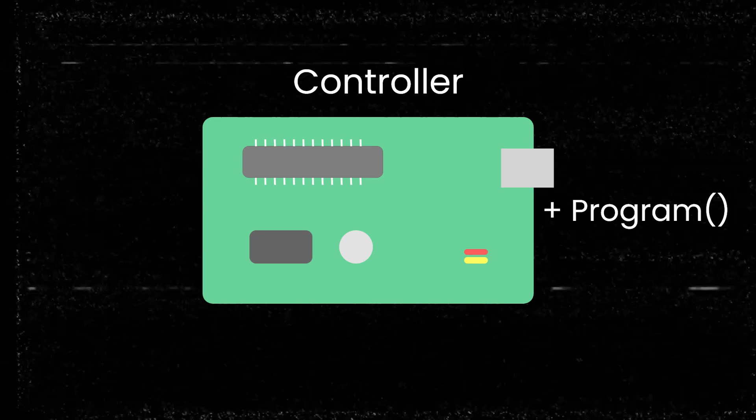For processes that don't require a human to decide how to do it every time, we can use a robot to do it automatically. Well, what is a robot? Software controlled mechanical device that uses sensors to guide one or more end effectors. Or it is just some parts connected to some motors, and the motors are controlled by some controller, which itself is blind and dumb. So we are giving it a program to follow and some sensors to see what is around it so that it performs some specific work.

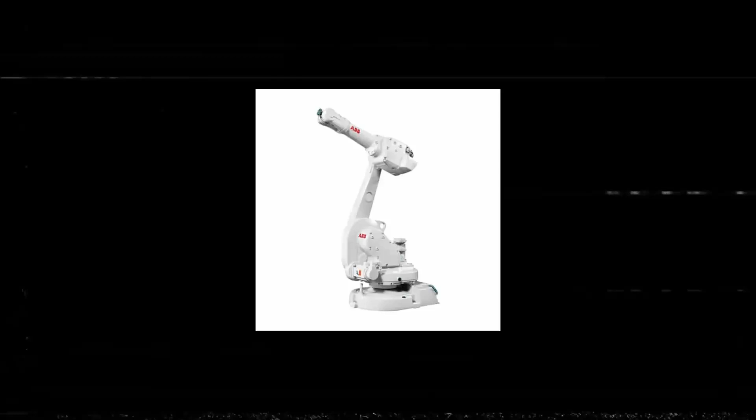Well, say you decided to buy a robot for your factory. Good. If you buy a robot from ABB or other companies, what you will get is a robot manipulator, which means the robot excepts the part which is actually going to interact with the environment. That part is up to you to decide. You can fit either a gripper or a tool or whatever you want on the attachment at the end of the robot. Whatever you fit there is called the end effector, and as the name suggests, it will be affecting or interacting with the stuff at the end of the robot.

Fine, now what? There is just one thing left, and that is programming. Programming your robot with the action that you want to perform. The action is mostly about covering a path while operating the end effector at specific times. How will you give a path? It's simple. We will just give certain points that our end effector should go through, and the controller will automatically fill the rest of the path.

Very cool, right? No, I joined a core company specifically because I don't want to do programming. And now you're telling me to do that? That too after I spent money on this robot? Calm down, comrade. You don't need to do programming. Instead, you get to play with a joystick. This is what you will be doing as an operator. You will use the joystick to move the end effector, and then you will press a button that will store the point. Like that, you will store a sequence of points, and your job is done, which is what we'll be doing today. We'll control an industrial robot, virtually, of course, using ABB RobotStudio.

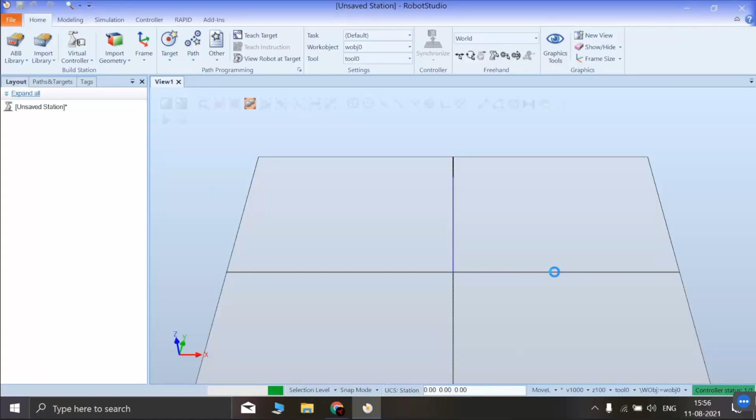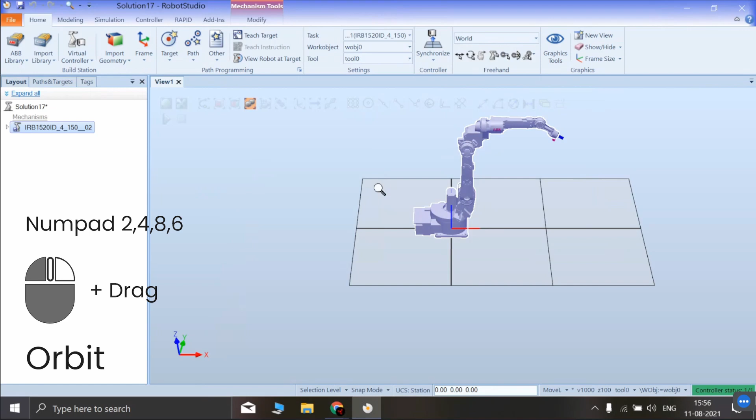Let's first set up a nice view for our robot, shall we? You have three types of motion here: zooming in and out using the scroll button. You can use your scroll button to zoom in and zoom out respectively, and rotating around the robot, aka orbiting, by clicking down both the right mouse button and the scroll button, and then drag. Here you can rotate your robot, and it's a bit fiddly, but you'll get the hang of it. Then panning, aka moving left, right, up and down, is done by holding the control button plus the left click and drag.

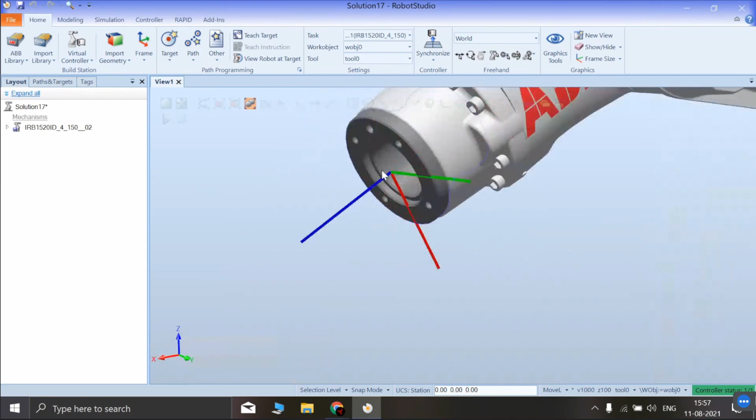If you don't have a mouse but you have a numpad, you can do it using the keys 2, 4, 6 and 8 for orbiting, and control plus the same keys for panning. And if you don't even have that, tough luck, bruh. Remember I told you about the end effector that you will attach to the robot? It is attached right here, this place. Moving that will be our goal. So yeah, we'll work on that.

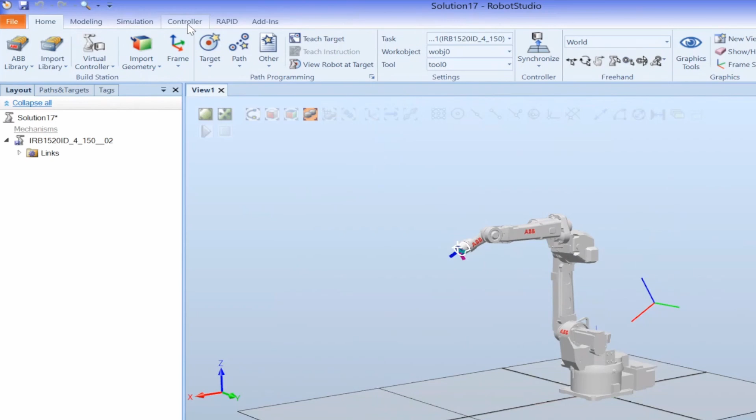And it is time we take a look at the controller, aka teach pendant or the flex pendant. It's basically a joystick. Look at the menu on top. We are in the home tab right now. Let's go to the controller tab and we'll pick our flex pendant. It's IRC5 flex pendant, it's just the model name. You can get this flex pendant for real in stores. So for now, we'll work on the virtual thing.

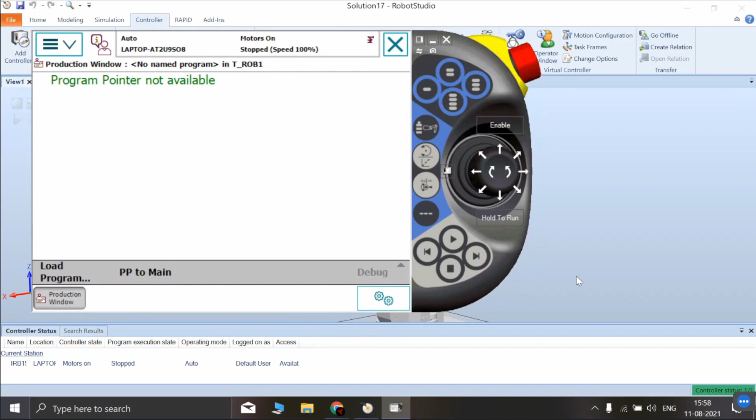But there's a thing, guys. I can't see my robot. How am I supposed to visualize it? So for that, let's try to drag it, and let's try to put our robot in a position where we can access both of the things. I guess this will work for me, right? Great. It depends on the software. Sometimes you get a teach pendant which is smaller in size, sometimes you get a bigger one. No issues.

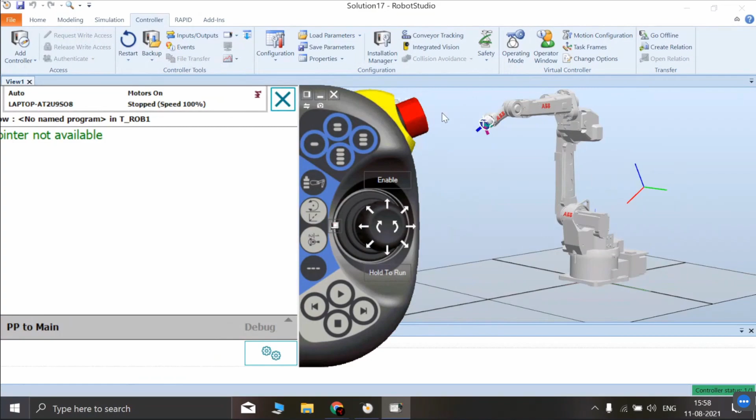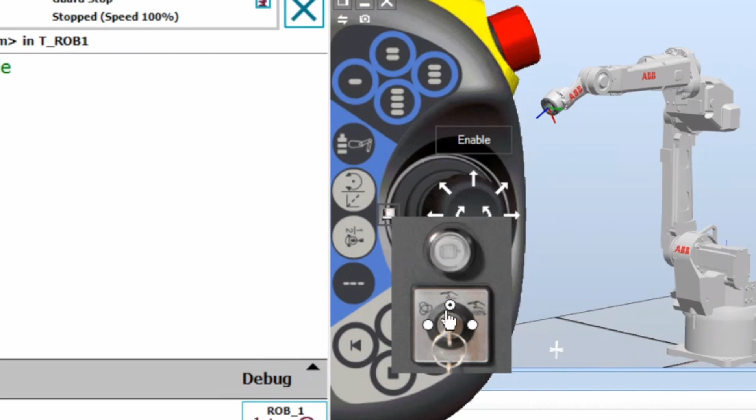So basically, there are 3 modes of operation which we can see by clicking this little icon over here. It's called control panel. Let's see it. The first mode which you can see is called automatic mode. In this mode, the robot will be executing the program we supplied to it automatically at full speed. This next mode is known as the manual mode. In this mode, we manually control the robot and create the programs. Also, the movements of this manual mode will be slow to prevent any accidents.

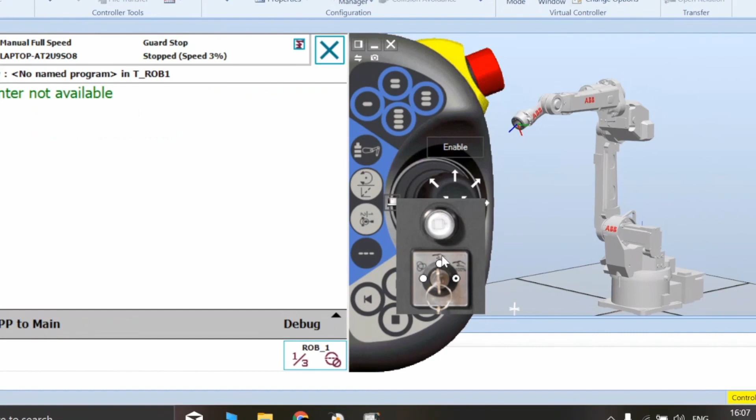This third mode over here is known as manual full speed mode. This full speed mode will do the exact same work as the manual mode, but with full speed, 100% speed. So let's put the operation mode as manual, and probably you can see this white blinking button over here. It is known as the motor engaging switch. This will be used to switch the motor and robot on or off.

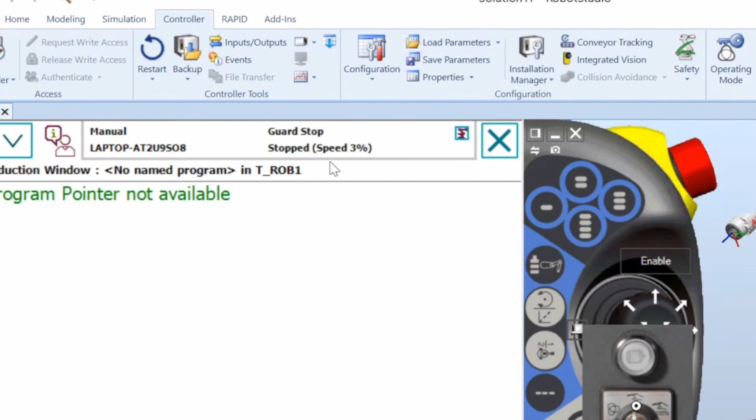Now you will be asking how to know if the motors are on or off. Well, that status is shown here. Currently, the robot is in guard stop state, which means it's stopped. Of course, we need motors on state, which is done by clicking on this little guy here. By enabling it, the communication between the flex pendant and the actual robot is enabled.

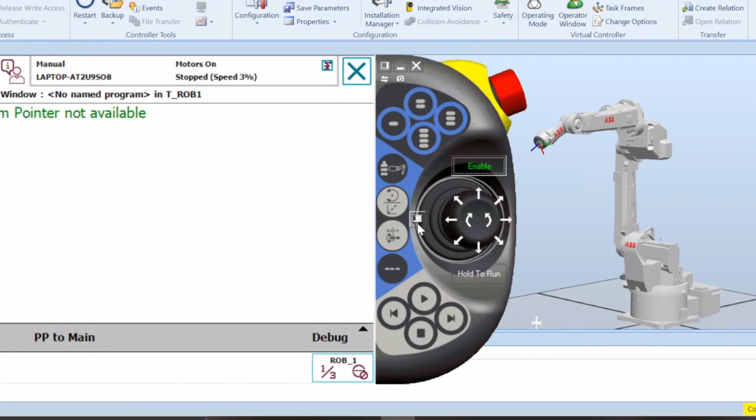A little warning, there is a possibility that sometimes the enable button doesn't put the guard stop off. Don't worry, it's just a glitch. You just have to switch that enable button off and on again and it will work perfectly. So I guess we enabled everything. All right, we have enabled the controller, put the robot in manual mode, and we are all set, people.

Joysticks, everyone's favorite. How to use it virtually? Simple. You can see the different arrows, right? Clicking on them moves the joystick in the direction. We have 3 independent directions to move it: up and down, right and left, and then twisting it. These 2 are for twisting it. With all that, let's see what happens when we do it.

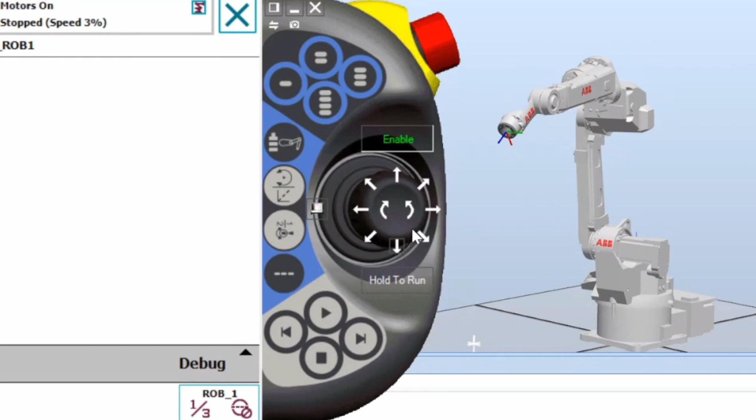Did you see that? It is working. Hope you're all doing it too. Play around with it. And of course, pressing the diagonal arrows is just gonna move the robot in both directions at once. Let's try it. Great, you can see it, right? It's quite acceptable.

Pretty simple, right? But stop. Safety first. What happens if you just made a program and while running it, some idiot decides to put their head in the way of the robot? Oh no, it's time to save him. Don't suit up, instead just press the emergency stop button and the robot will halt. And you can see the status changing to emergency stop.

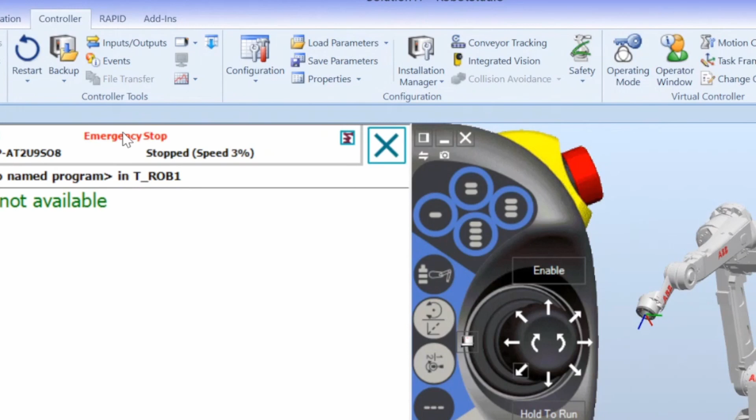If you want to restart it, just follow this order: release it, enable it and disable it. Just go on the motor and enable it. There you can see the motor is on again. And now you can enable the controller and start using the joystick again. Let's try using it. Great. So it's still working, it started working again. Good job. You learned a lot of stuff. Now relax.

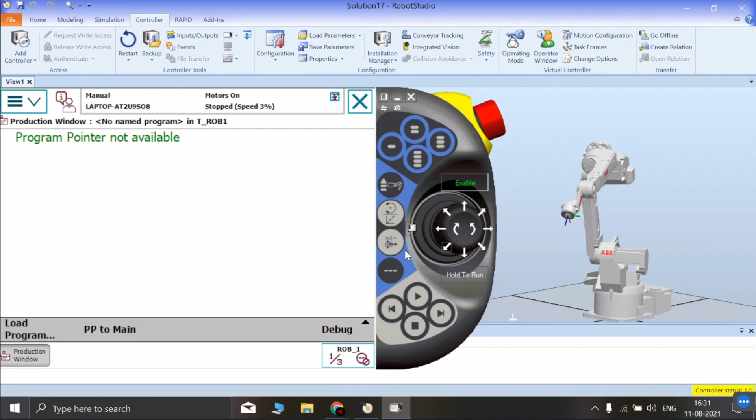Hey, do you know that what you just did was called jogging? And also, do you know that there is a bunch of settings related to jogging? Let's see that too, shall we? Let's open the jogging window from here and click on it. Whoa, that's a lot of settings. Let me just show you some of the important ones as of now. And look at these angles, right? Remember when I said this robot has 6 axes? These are the 6 axes.

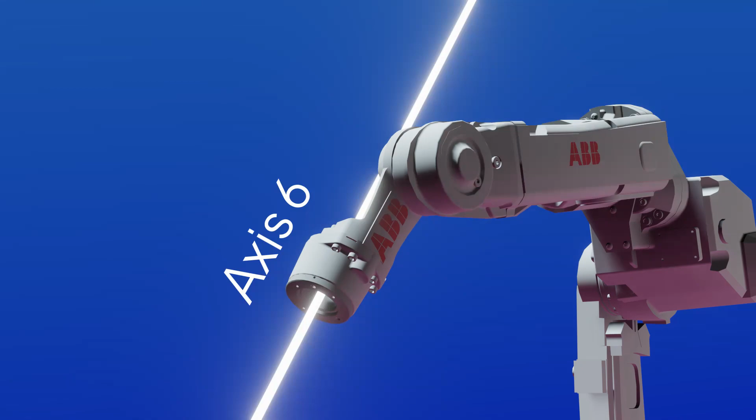They are the angles in which the axes are rotated from their normal location. When you use the joystick, these angles change. Let me demonstrate it. Great, can you see axis 1? The angle there keeps on changing. Now it's increasing, and I can decrease it and keep it at 0 again.

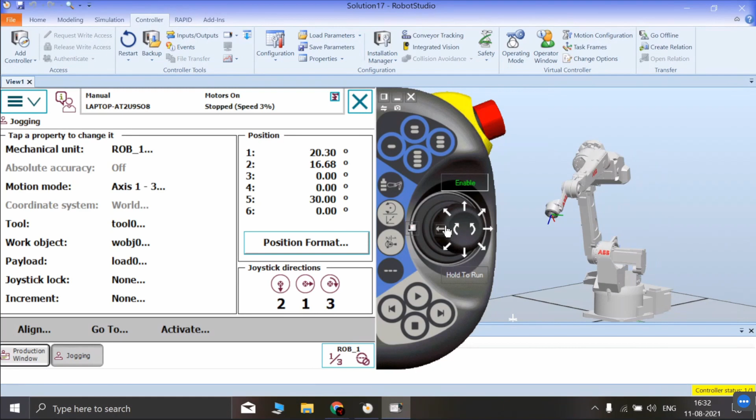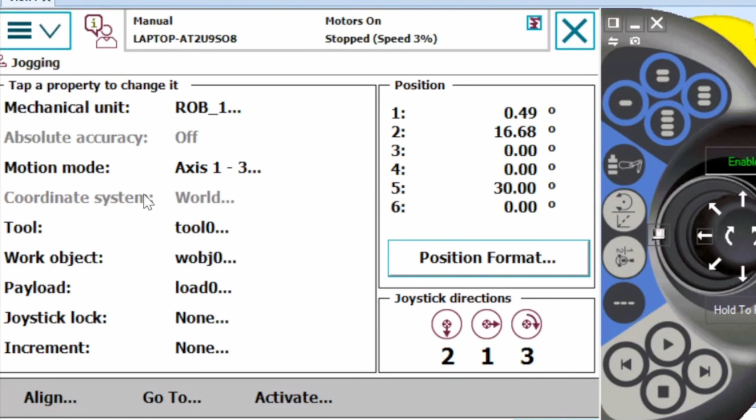Great, it's almost 0. This system over here is known as coordinate system. This is another setting which tells the controller with respect to what axis we are describing the system. Did that just go over your head? No problem, you'll get it later in this series. Just know that the word world means we are measuring the robot's joint angles with respect to the coordinate system connected to the ground. And there is another with respect to the end effector.

Here is the important setting. Remember this one, motion modes. This setting decides what the joystick will actually control. We clearly saw that at a time we just have 3 independent directions we can move the joystick in. This setting will specify what axes are going to be controlled by these 3 directions in the joystick.

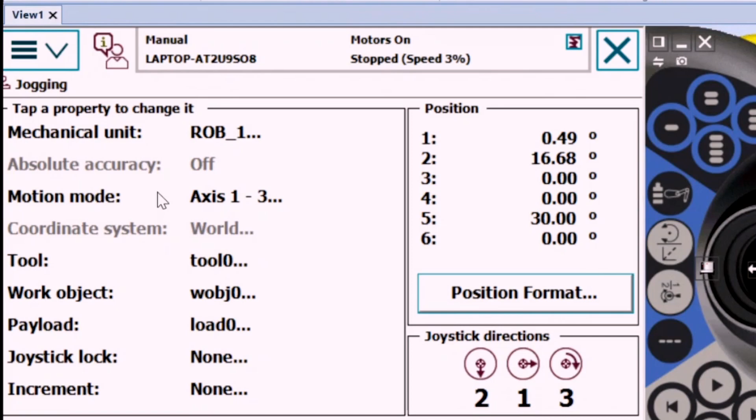Let's see what options are here. Let's click on it. 4 options we have. We have axis 1 to 3; let's try it. Let's click OK. So it was by default this one only. So basically, this will let you control axis 1, 2, and 3.

How do we know what direction in the joystick is controlling what axis then? Simple. Do you see these indicators in the bottom right corner? This gives you the information. Let's try it. Let's click on this down button and it's moving the second axis. Let's do this. And we are moving the first axis in both directions. And let's try this one at last.

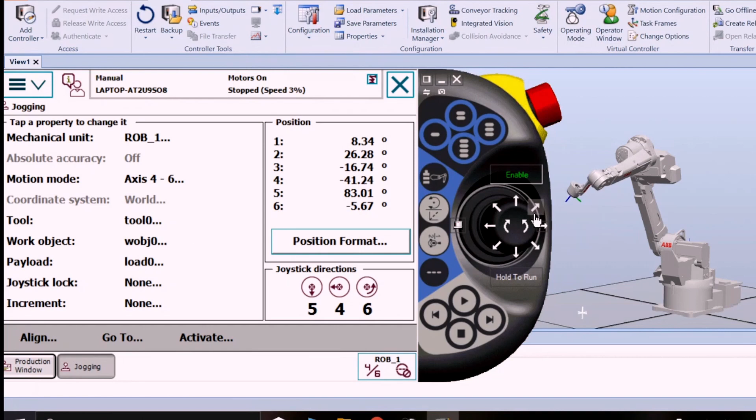Okay, it's working. Now let's change the mode and click on this one, axis 4 to 6, and let's see what happens. We should be able to control axes 4, 5, 6 using the joystick. Let's try it. Great. Let's try this. Yes, it is working. For this one, let me give you a clear look. Let's see it. And yes, it is rotating. Okay, that is it. We are done.

Or are we? Well, sometimes it is just inconvenient to control by robot axis to get to a point. Say, what if you want to move the end effector on a single line? Well, in that case, we have another 2 settings. You might have also noticed that there are 2 more motion modes. These modes are called linear and reorient mode. These modes are not concerned with the individual axis. These are concerned with the end effector's position and orientation.

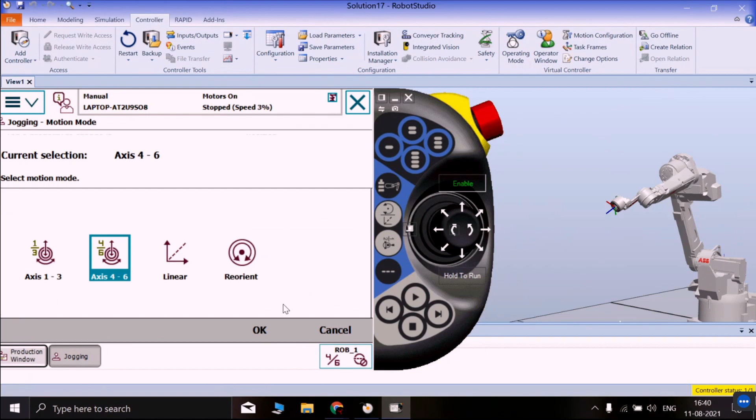Let's put it on linear mode as of now. Let's click OK. And first let me just make it look clear. One second. Great. Let's get back to linear mode. Now we should be able to move the end effector in X, Y, and Z axis instead of individual robot axis. Let's try it. Great.

Well, before, when we were controlling the axes individually, the end effector's position was forming an arc. But now you can see clearly that the end effector is moving in a straight line. That is, several joints are moving at the same time. Now, what if we want to change the orientation in which the end effector is approaching the target? Well, for that we have reorient mode. Let's switch to that and see what it does.

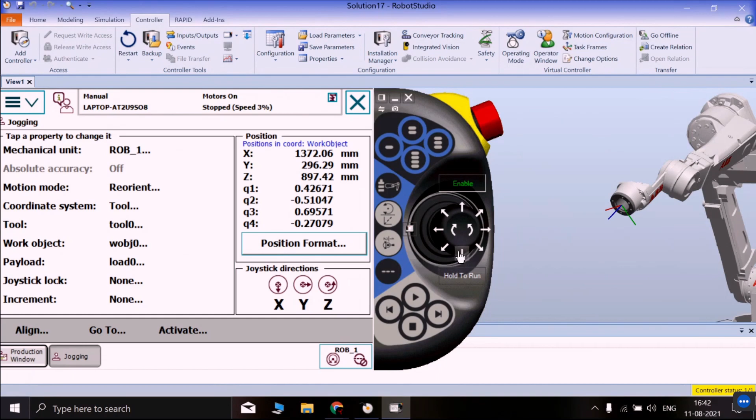Let's try to use it. I'll just zoom in for a better look, and great. So this mode maintains the position as constant and rotates the end effector, and thus it changes the orientation. So we're done, right?

So that is it, guys, right? We are done with this video, I guess. So I gently advise you to play around with the joystick a little bit, and in the upcoming videos we will see how to convert all these motions and store them in a program which can then be automatically repeated by the robot.